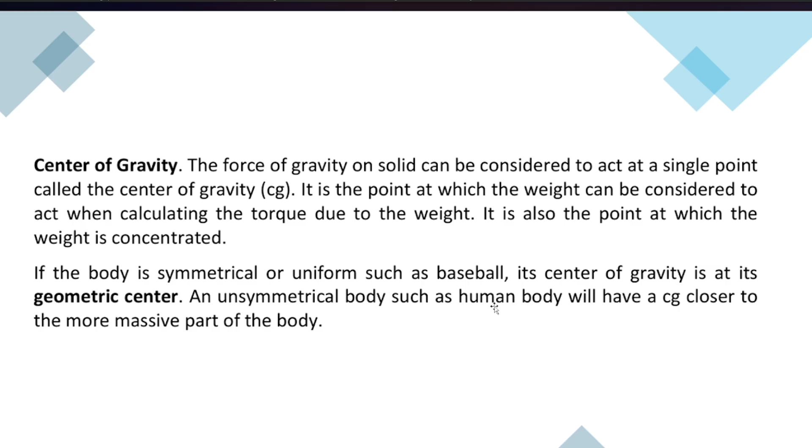So there are multiple ways of finding the center of gravity, for regular and irregular shapes. We have the plumb line method, which we'll hopefully do in a laboratory experiment in the upcoming weeks. It involves suspending an object from any two close locations and dropping plumb lines from the suspension points. The intersection of these two lines is the center of mass.

Now let me show you the plumb line method, using a YouTube video prepared or created by Evan.

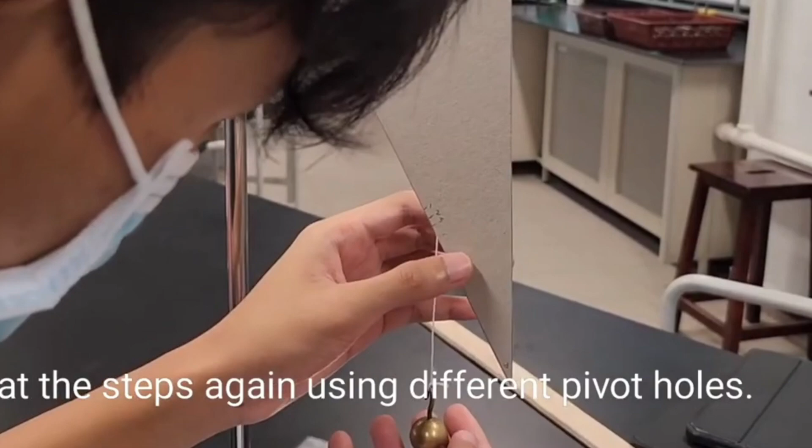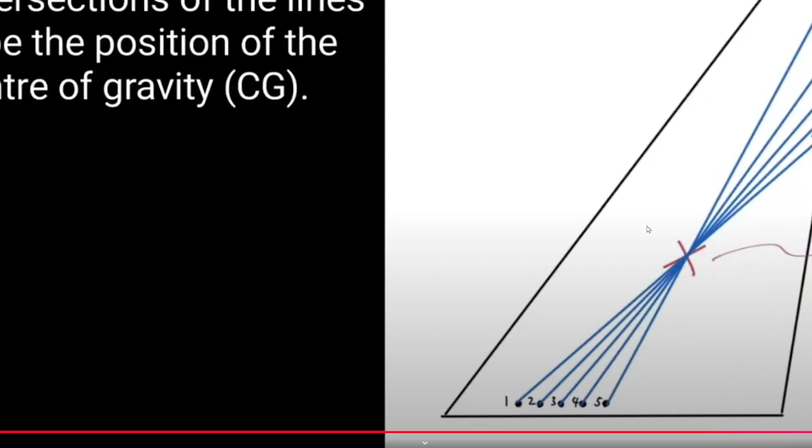As you can see, what was done in the video: they hung an object, in this case a triangle, and punched 1, 2, 3, 4 holes. These become the first, second, third, and fourth points. Then lines were drawn at the end of the triangle where the plumb line, or string, fell. After that, once the lines were drawn, their point of intersection is actually the center of gravity of that shape object. Here they used a triangle, but using the plumb line method, you can use different shape objects, especially complex irregular shape objects. You can use the plumb line method for those. Okay, so that's the plumb line method.

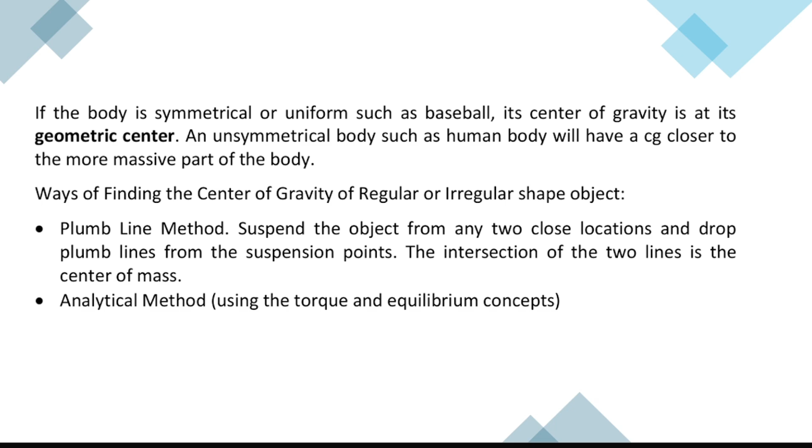Moving forward, we have the analytical method, which is what we'll be doing, using the torque and equilibrium concepts. Center of gravity of composite objects along the x-axis using weight: the center of gravity equals the summation of torque over the summation of mass. So you have m1x1 plus m2x2 plus m3x3 and so on, over m1, m2, m3, or the sum of the total mass. If the y and z axis is involved, the same concept applies — just replace the x component with the y component if that's what you're finding, or the z component if that's what's needed.

Calculation of the center of gravity involving other quantities like area, volume, and length can also be obtained. So if mass isn't given but area is, that's fine too. You'd use area1 times x1, area2 times x2, area3 times x3, over the total area. For the y component, it's area1 y1, area2 y2, area3 y3 — as long as the units cancel between numerator and denominator, since y and x are distances. So to find the center of gravity, we need coordinates, meaning distances.

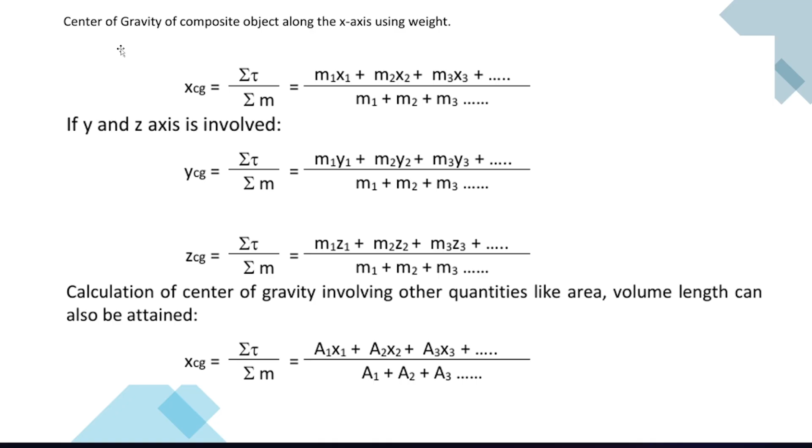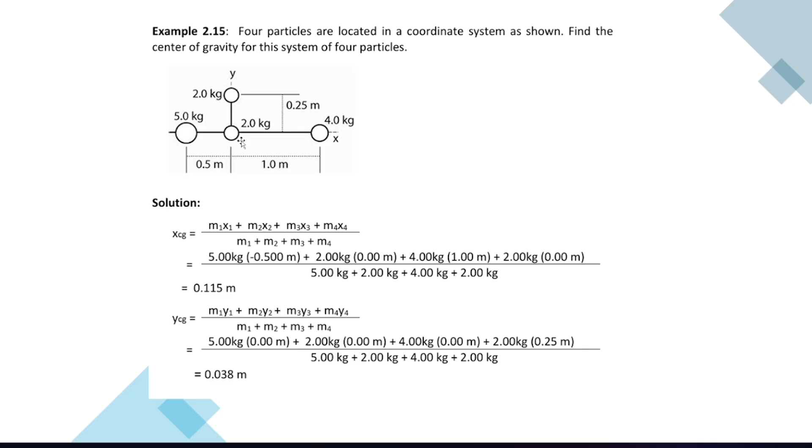Example: 4 particles are located in a coordinate system as shown. Find the center of gravity for this system of 4 particles. You have 5 kilograms at 0.5 meter away from a 2 kilogram mass. Then a 2 kilogram mass at 0.25 meter on the y-axis at this point. Then a 4 kilogram mass at 1 meter away from another 2 kilogram mass. So the easiest thing to do here is to set a coordinate at this point — let's put a Cartesian plane first, and find the line.

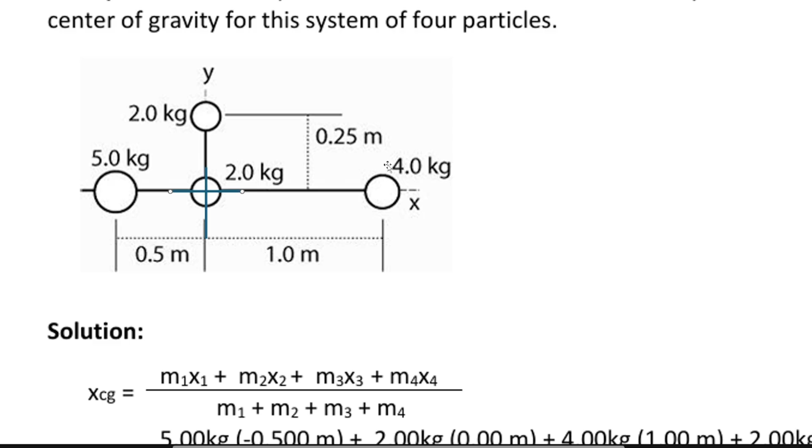So, first, meron tayong 5, 2, at 4 kilogram. Pag-aarin ko lang yan, M1 plus M2 plus M3 plus M4, yun na yung magiging denominator ko. So, 5 kilogram, 2 kilogram, 4 kilogram, and another 2 kilogram. Ito yung summation of the mass.

Next, paano nangyari to? So, M1, X1. Let's say yung M1 ko is yung 5 kilogram. Tapos, yung x1 ko, pansinin nyo, bakit negative 0.5 meters? Kasi, from the Cartesian plane, bumilang ako ng negative 0.5, going to the negative x-axis. Saan yun? Ito yun.

From this point, up to this point, negative 0.5 yan. Kaya ang naging value dito, 5 kilograms times negative 0.5 meter.

Sunod naman, you have here 2 kilogram multiplied by 0 meter. Bakit 0? Kasi doon yung reference point natin, like sa torque. If dyan yung reference point mo, 0 yung magiging value mo dyan kasi dyan ka naka-reference. Next naman, si 4 kilogram multiplied by 1 meter. Obviously, 1 meter siya dahil you have here 1 meter of distance from the 4 kilogram, positive x-axis.

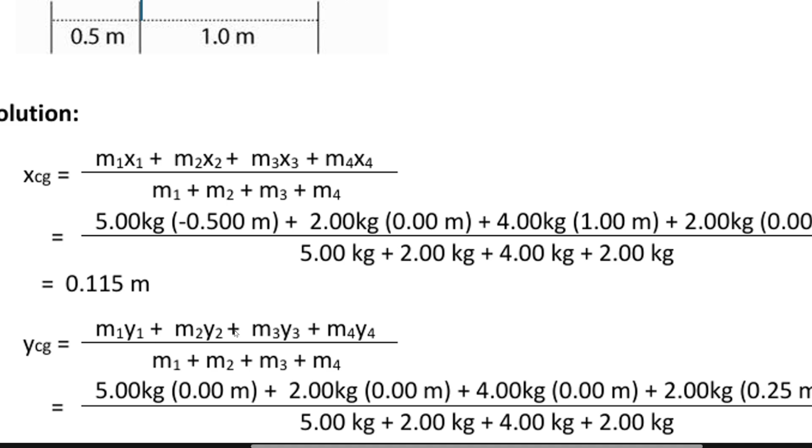Sa y component, same ang storya. So you have here yung 5 kilogram, multiplied by 0. Bakit 0? Kasi yung inangat niya sa y-axis is 0. Hindi naman siya umangat eh, dito pa rin siya katapat. So therefore, 5 times 0 siya.

Next is 2 times 0, 0 pa rin dahil nakatapat dito sa 2, wala siyang inangat. Next naman is yung 4 kilogram times 0, so wala pa rin inangat. Kahit may 1 meter na haba yan, wala pa rin siyang inangat sa y-axis.

Then lastly, yung 2 kilogram times 0.25. Ito siya, all over the summation of the weight ulit, or yung mass. So you have here yung 0.038 meter.

Now, ano ba yung ibig sabihin ng COG na yan? Para mahanap ang COG, bilang ka daw ng x component na 0.115, tapos bilang ka daw ng 0.038 pataas. At this point, hindi dyan, dito sa center point, kumbaga kung saan ka nag-Cartesian plane. Bilang ka daw ng 0.115, tapos bilang ka daw ng 0.038 pataas, nandun daw yung center of gravity of that 4 points. Okay, so you can replay this video naman.

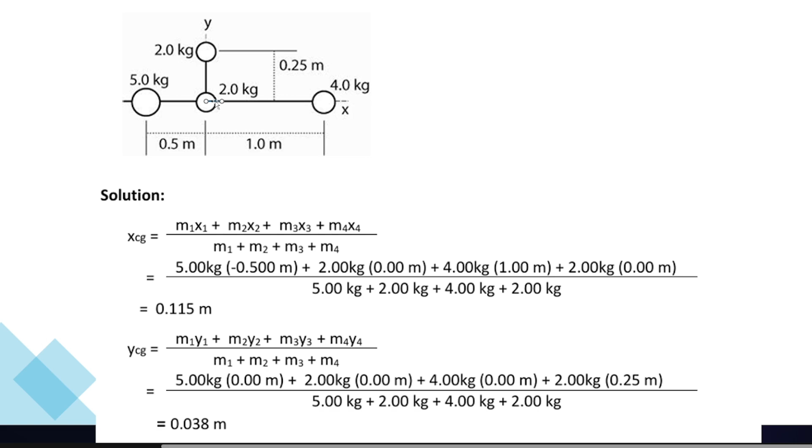We're moving forward for our next problem. Example 2.16. Determine the center of gravity of the L-shaped glass as shown.

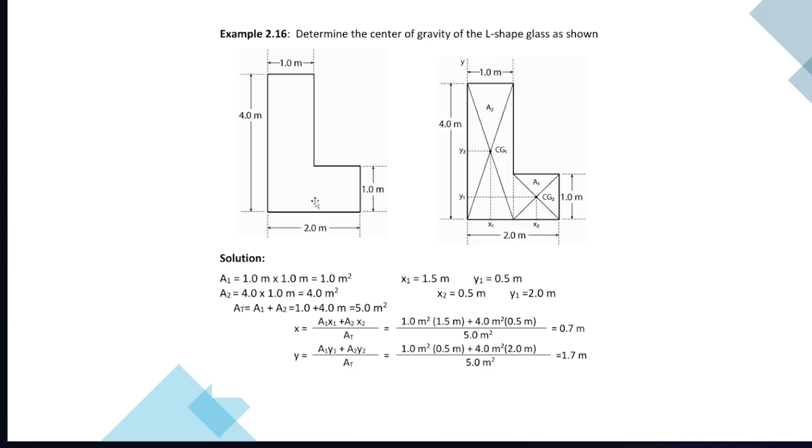Papansinin niyo, ang center of gravity ng isang rectangle is right at its center point, kumbaga saan nagka-cross yung diagonals. So, in this case, kung ito yung diagonal natin, yan. So you have here yung 1 meter, 4 meters dito, at 2 meters to. Kung 1 meter to, 1 meter din dapat to, nandito from this point. Tapos, ito naman, 2 meter and 1 meter.

Let's consider 2 points, itong this point and this point, yun yung mga gitna niya. This point and this point. So, therefore, parang dalawang object yung gagawin natin. Pag ganito mga shape objects, mas mainam na hatiin. Parang hahatiin natin dito, yan, dyan.

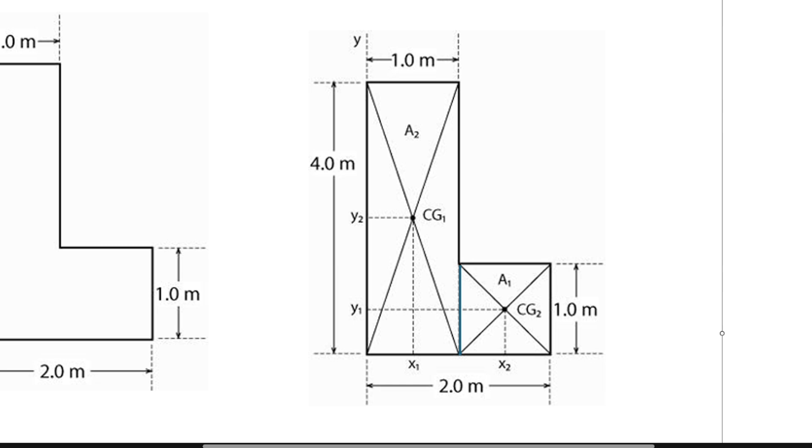So, meron tayong shape 1, item number 1, ito, this whole point. Tapos, ito namang si item number 2. Dalawa. Sir, paano kung hindi ganyan yung hati namin? Ang ginawa namin is ganito, tapos ganyan din.

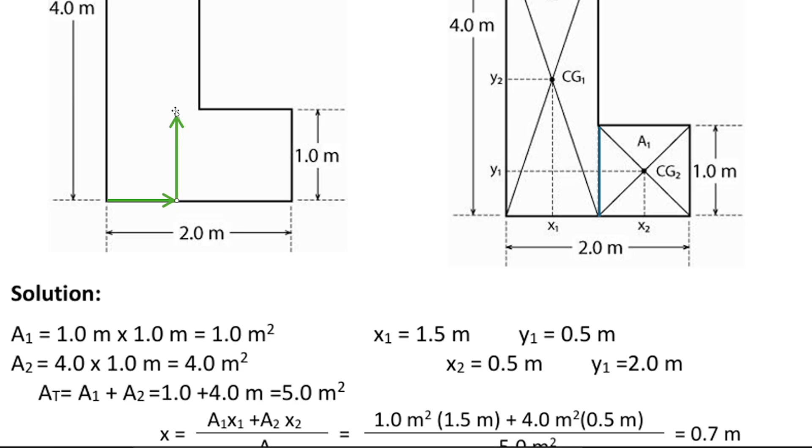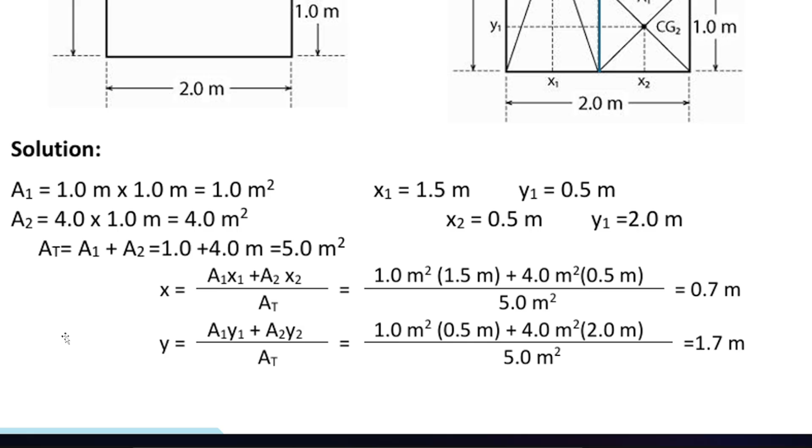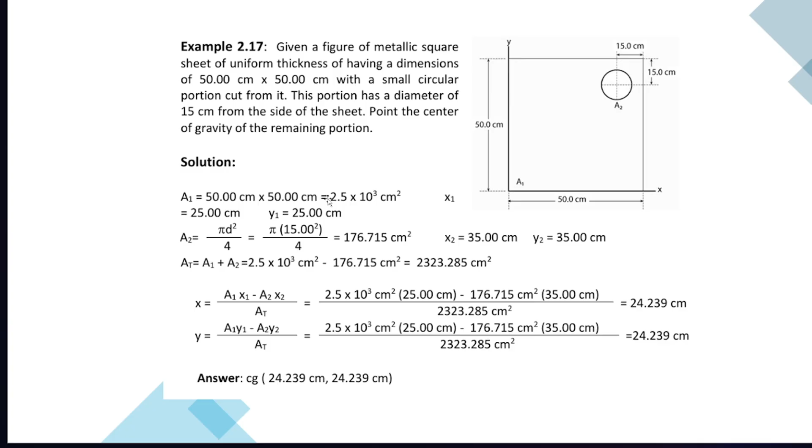Hahanapin natin. So you have here yung area 1, yung area ng buong square na yan. That will be 50 by 50, lalabas 2.5 times 10 raised to 3 square cm. Or you have here 25 cm, or rather 2.5 times 10 raised to 3 cm. Ito nga yung area.

Para makuha yung kanyang COG number 1. Ito yung COG number 1 niya, this will be yung 25, dito kalahati nito, at kalahati din nito. Kalahati niyan at kalahati niyan. So you have your 25 and 25, dito gitna nung square na yan, kung wala yung bilog na yan.

Next naman, yung area naman ng bilog. So you have here pi d squared over 4. Pwede naman kayong gumamit ng pi r squared. In this case, pi d squared over 4, pi multiplied by 15 squared over 4, lalabas is 176.715 square cm yung ating bilog.

Now to get naman yung kanyang center of gravity, pansinin nyo, 35 and 35 dito, para nakuha yun, 25, this will be 25, plus yung konti dito na 15 cm, nag-minus na 15 dito, lalabas this is 35, 35 yung x component na yan. Tapos mataas naman dito, this will be also 35, 50 minus 15, 35. Doon makikita yung gitna ng bilog na yan.

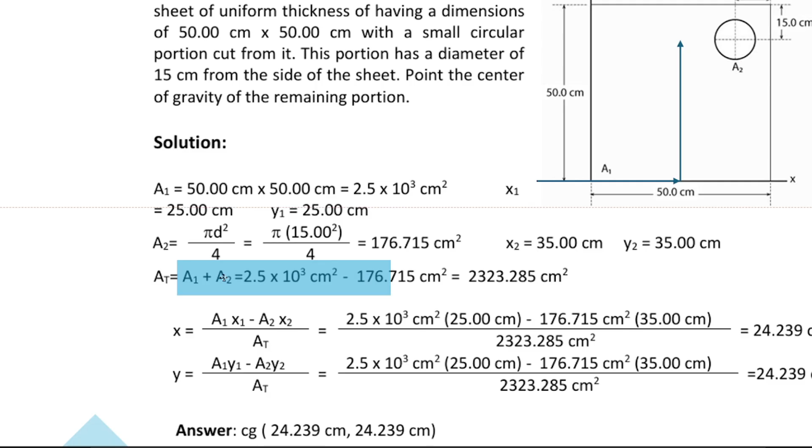Regardless kung butas o hindi, that will be a center of gravity na kailangan natin kunin. Papasukin nyo yung area. You have yung area ng box, 2.5 times 10 raised to 3, minus natin yung 176. Nag-minus tayo, in this case nag-minus. Bakit minus? Kasi yung pag-minus nito sa ating bilog is cavity, butas yan. Pag butas, minus yung area, obviously. Pag nakaumbok yung bilog, plus dapat yung ating area. In this case, negative siya dahil butas to.

Meron tayong portion of diameter cut, from the side of the sheet. Naputol yan. So therefore, ang ating total area is 2323.285. Ito na yung total area ng sheet na to na may butas ng napabilog.

To get the x component, same ng story. You have here 2.5, area 1. Area 1 is still 2.5, yung malaki na to, times 10 raised to 3, multiplied by 25, 25 sa x1 niya, minus 176. Sir, bakit minus? Kasi nga cavity o butas ito. 176 times 35 yung kanyang x2, all over total area of 2323.285. Lalabas 24.239 cm yung x component of the COG.

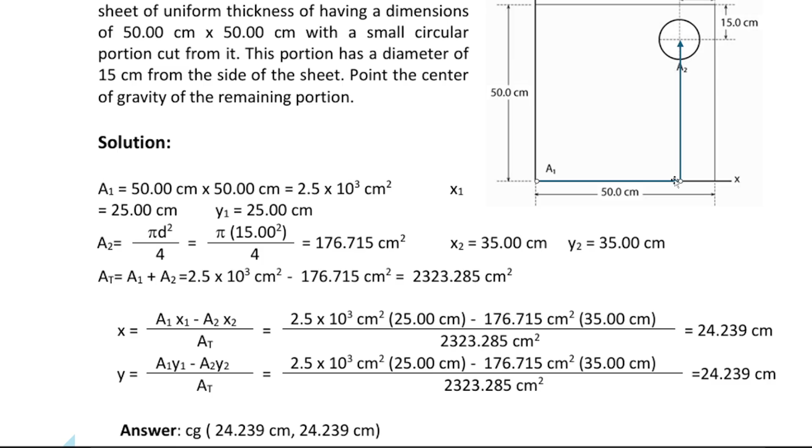Para sa y naman, same ng concept, parehas pa rin. 2.5 times 10 raised to 3 multiplied by the y1, 25 cm, minus 176 area ng bilog, times 35 cm, you have here all over 2323.285. Lalabas ulit is 24.239. So therefore, sinasabi dito na ang center of gravity niya, pag bumilang ka daw ng 24 dito at 24 dyan, nandyan yung center of gravity niya. From originally, nandito yan eh. Parang nandito yung original na center of gravity niya, na naoffset dahil merong butas. Nagkaroon dito na 24.2.

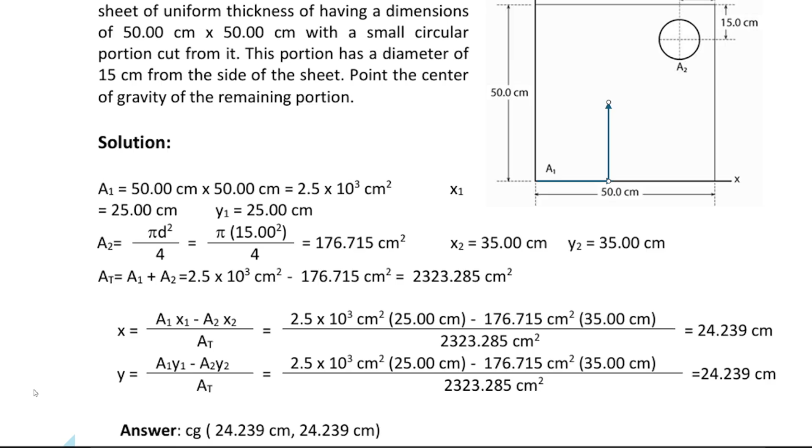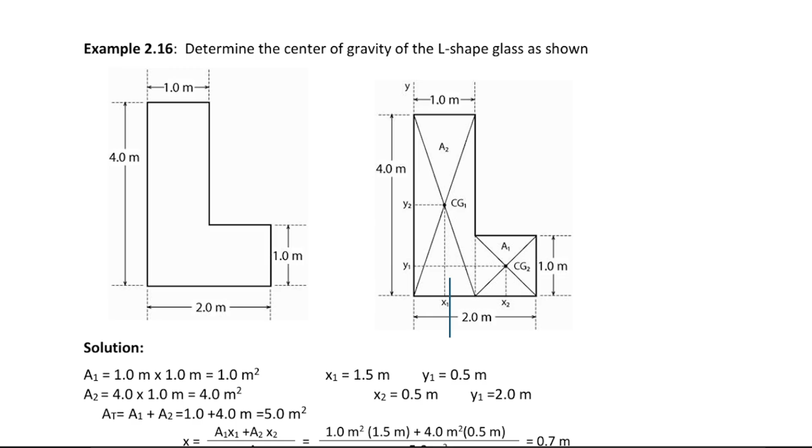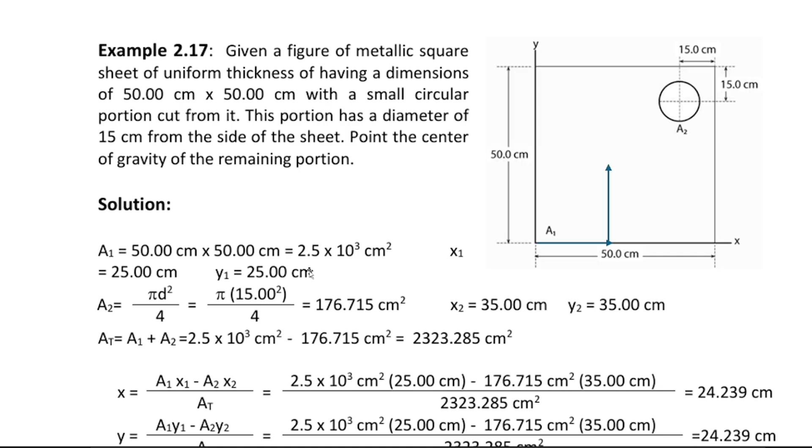Okay, so I do hope na nagawa nyo ito.